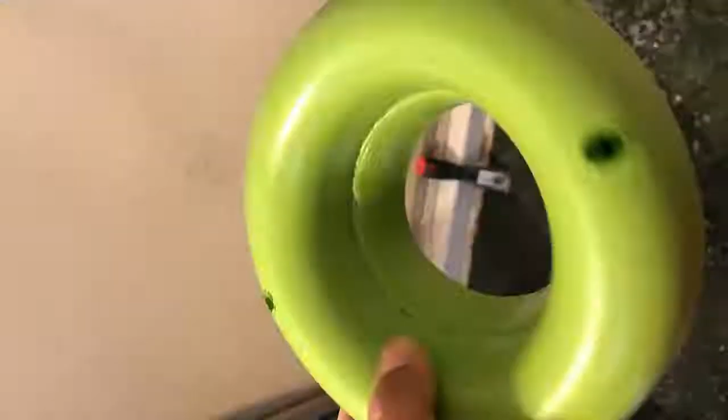Let's go ahead and install this thing. I already went ahead and flipped this down. This part right here is gonna go down into the drain. So get this, align it with your holes, and then just slide it down on top of there.

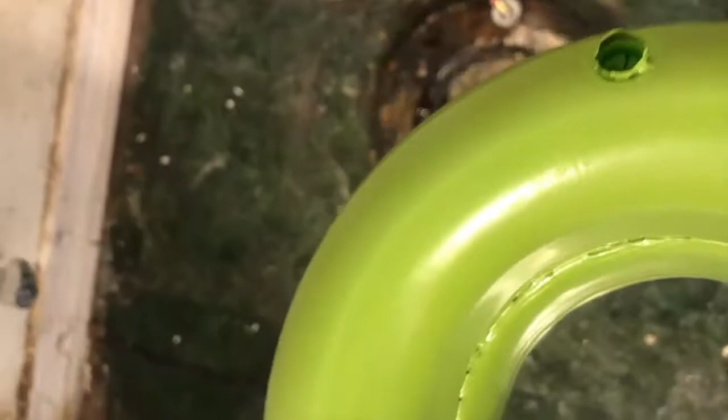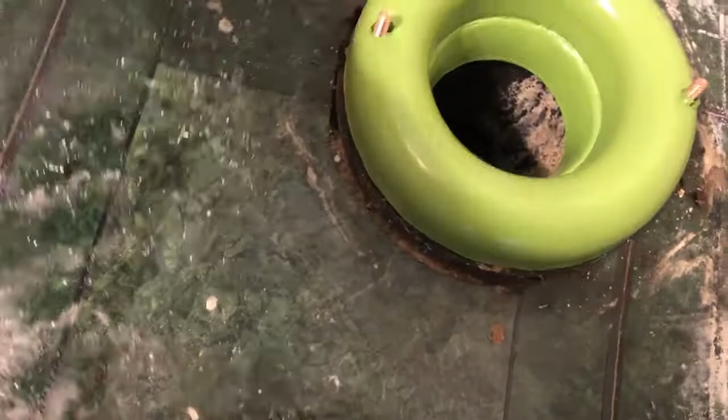That's disgusting, anyhow, let me go ahead and do that. I need both hands for this. Oh my goodness, I hate plumbing. But anyhow, there it is. It's sitting on there with the flange, with that inner whatever. It's just going down into the drain. So now I'm just going to go ahead and set the toilet right on top of it. Now I'll be right back.

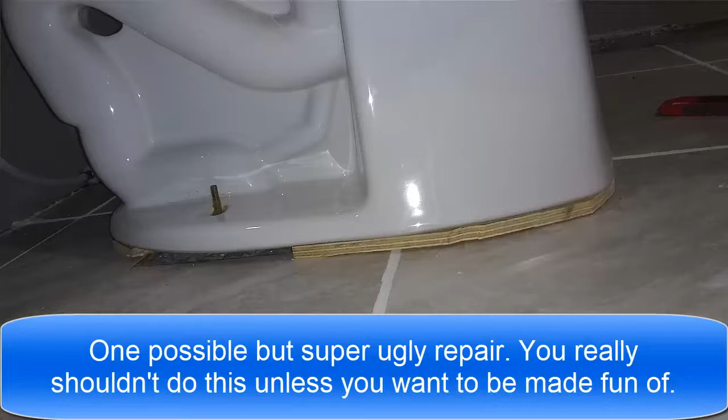Okay, so small problem. My flange actually is higher than the floor, and I cannot compress this down. Look at how high it is. Can you see that? It's like lifting it off the floor, so it's just too high. It won't be a big deal because there's going to be tile in here which will be higher off the floor. But in the meantime, I want a toilet, so I'm going to have to put shims on this so that it can sit down nice and flush.

Yeah. All right, let's go get some shims.

So I would like to mention a couple times where this product is just great and it's going to excel, and other times where it's probably not the right product. So when's it going to be really good? Let's go ahead and show you.

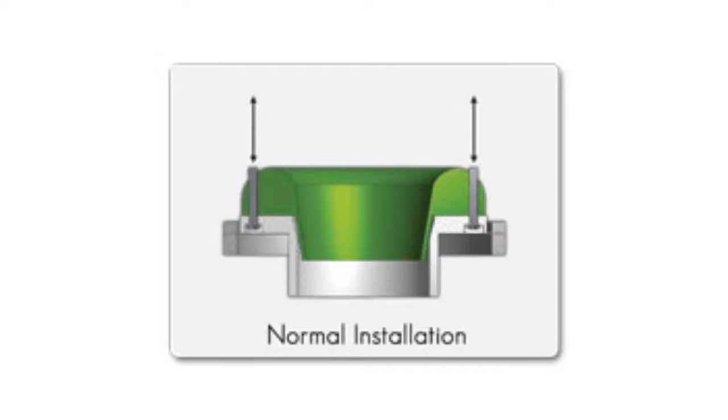The material I use is very spongy, but it doesn't compress completely. The nice thing about this is if you're putting in your toilet and you're not too sure, like your first time, and you need to take the toilet back off because it didn't sit down properly, this is perfect because you can compress it and it'll uncompress, and it works great for that. Whereas if you try to use a wax ring, it's going to compress once and that's it. After that, you have to remove it and put on another one.

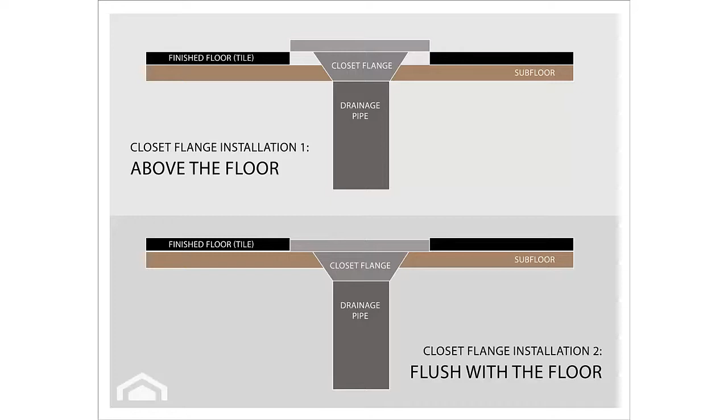Yeah, so let me show you. So let's say this is your subfloor. Now the subfloor is going to be like concrete or plywood. This is your base material. And then you're going to have your finished floor.

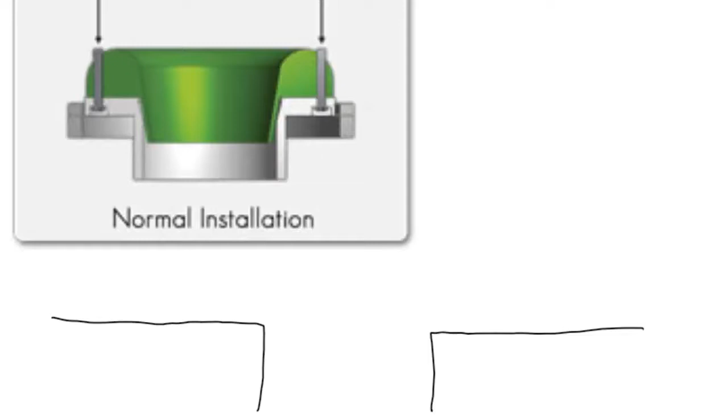So this is where I think it's perfect to use the Saniseal, okay? This is your finished floor. Your finished floor is going to be tile, linoleum, hopefully not carpet. I really hope you're not using carpet in the bathroom, but you know, some people have. Anyhow...

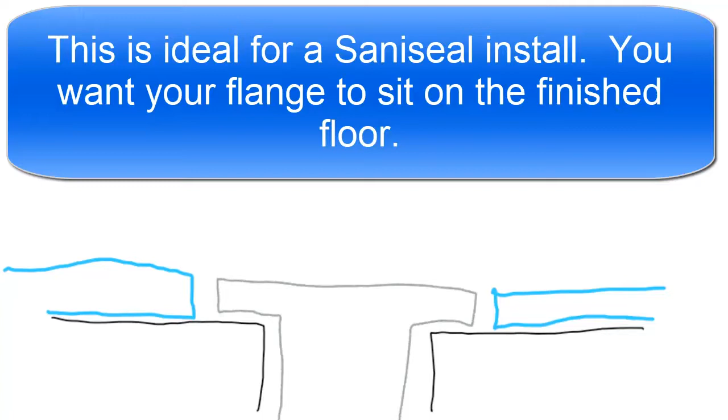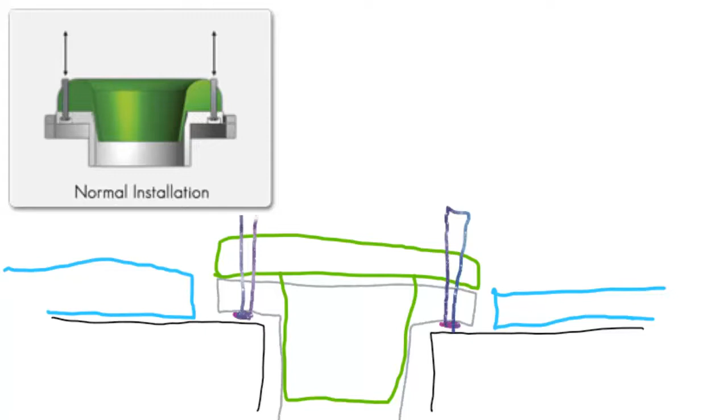And then you're going to have your Saniseal, and it will sit right here, right on top, just like that. Ideal situation. Oh, and then of course you're going to have the flap. That flap's going to go down into here like this, attaching there. And then of course you're going to have your bolts where you're going to attach the toilet to your flange. Here's your bolt, comes up through here. Your other bolt comes up through here. And then you set your toilet on top of this. And when this toilet sits on this, it's going to squeeze the Saniseal down and it'll fit, nice and perfect. This is the ideal situation.

Here is your toilet. Your toilet's going to compress down. It'll sit right on there, and it's going to go up like that.

Well, this is going to be compressed, so it's actually going to be like this, and then up like that, and there you've got your toilet, okay? So this is the ideal situation. This is when I definitely think the Saniseal works very nicely, especially if you have to take this back off and put it back on. This is a situation where I would use it.

Now I'm going to do the next situation, where it's still okay to use and probably pretty good to use. So here's your subfloor, that's the concrete, plywood, whatever, and then you have your toilet flange, like that. But then here's your finished floor, and this is going to be either very thick tile or laminate, or you're setting your final flooring on top of something else. So all of a sudden your finished floor is going to be much higher than the flange.

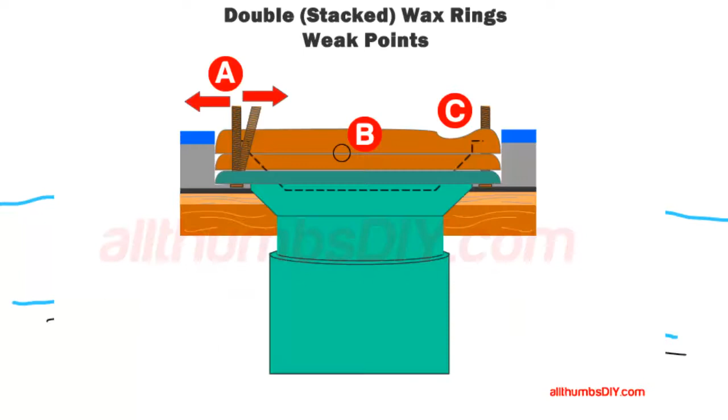In this situation, Saniseal also works quite nicely, because what you could do is put two of them down, like that. Then you have your second Saniseal, which goes right on top of that one. This works fine too. I mean, they say if you're going to do it like this, put double, then you're going to want to put some silicone down in between them, and silicone right here. At least that's what the manufacturer recommends, to put silicone there if you're going to use double Sani seals. But in this situation, it would work fine too.

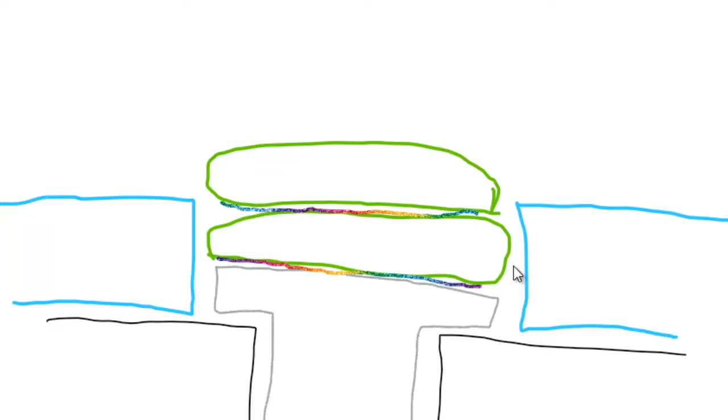So those are the two situations where you can use a Saniseal. This is the ideal situation, and this is less than ideal, but it'll still make it work.

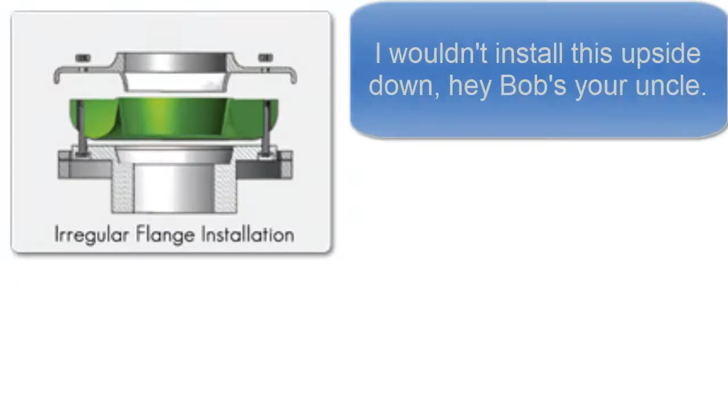Now, this is a situation where I don't think you should use the Saniseal. So here is going to be your finished floor, and it's going to come all the way to the end here. And all of a sudden your toilet flange is sitting on top like this. So this is where your toilet flange is sitting on top of your finished floor. You're going to have issues here because your Saniseal is going to sit on top of here like this.

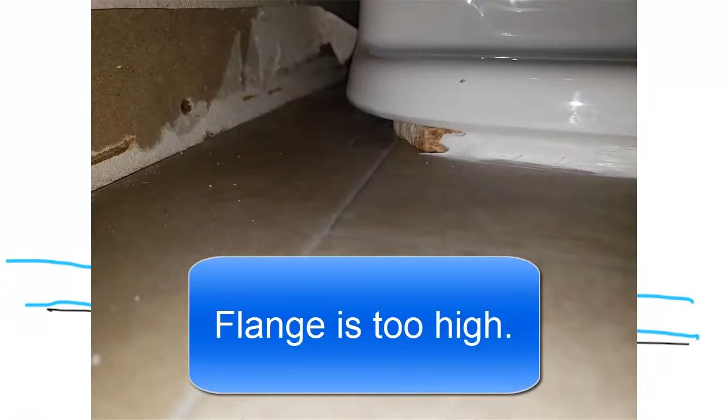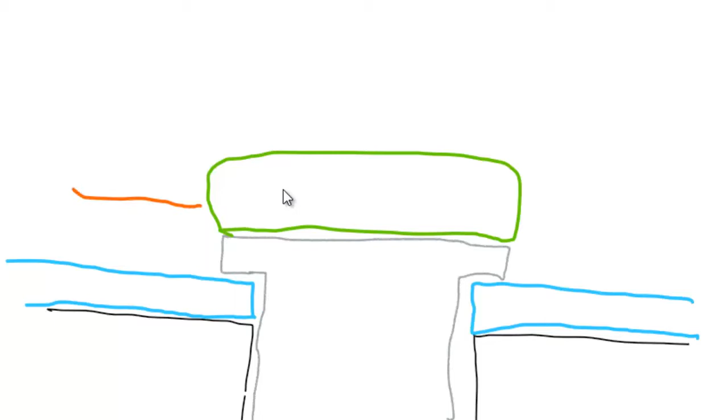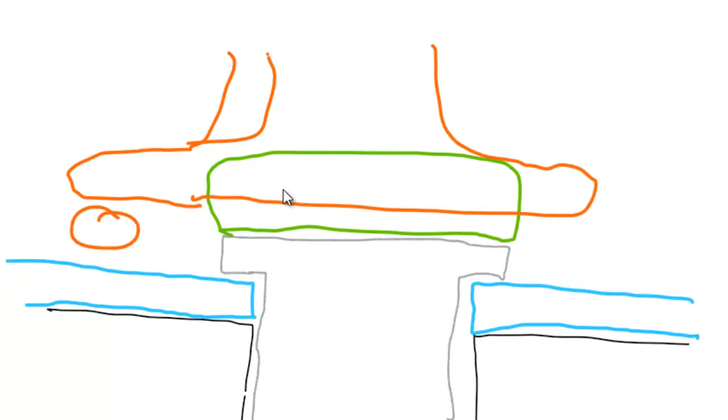And then you're going to try to put your toilet down on here. The problem is that your toilet will not go any further down than about there. So the problem with this is you're going to have a big gap here and here, which is what I'm about to show you. And then you're going to have to put a bunch of shims underneath to make it so that your toilet seat doesn't rock. Anytime you're putting a bunch of stuff here, your toilet seat will always rock. It doesn't matter if you're using the Saniseal, wax, or a rubber gasket.

It's going to rock because it's just too high, and the toilet is not sitting on the finished floor, it's sitting on this. So in this situation, I wouldn't use the Saniseal. I'd use a wax ring without the rubber on it, just a regular wax ring. Get it nice and hot or pretty warm, and then smash the toilet seat down on top of it. But I wouldn't use a Saniseal for this because it's too high.

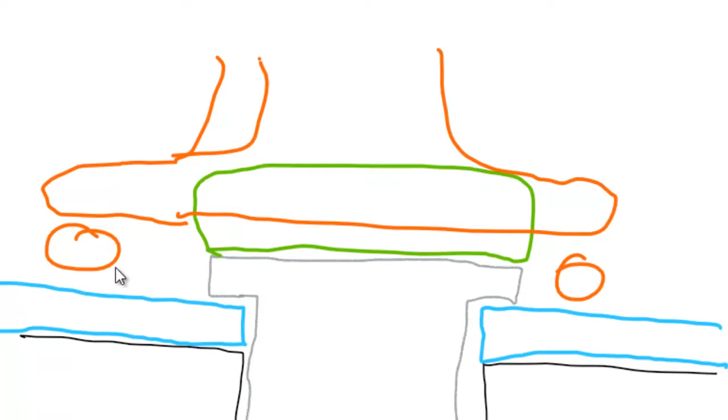So those are the three situations where I would say you either should use it, it's pretty good, or don't use it. Okay, so anyhow, I think that just about covers it for the video. In the video, you see me finishing up, and my toilet seat ends up like this, so I put a bunch of shims, but I'm not worried about it because mine's going to end up like this. I'm going to actually put my subfloor here, and it'll sit parallel with my toilet flange. That's because I'm going to put tile there, and it'll be nice and high, and it'll sit just nice.